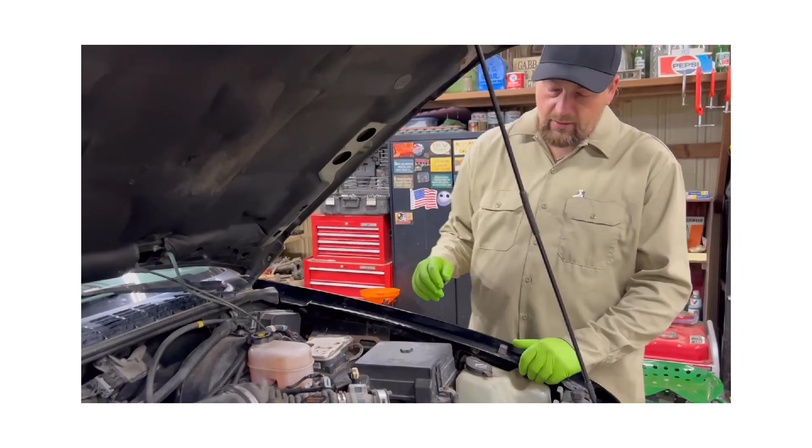Look here at our first part. Here's where the air comes into the engine. It goes through this filter, then up through the box I just took out, to our mass airflow sensor.

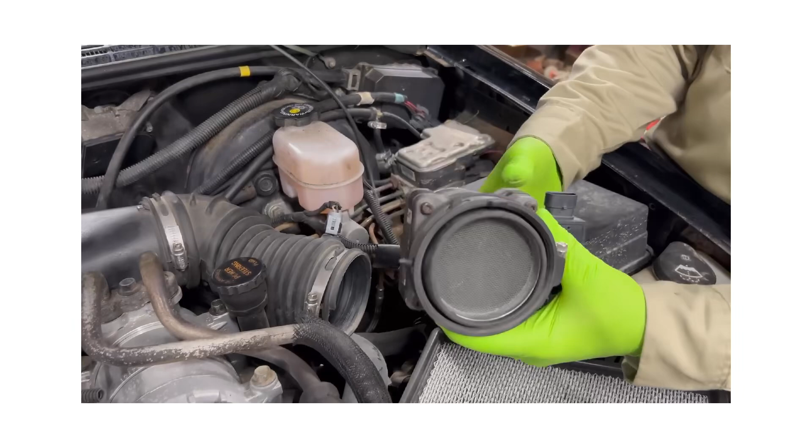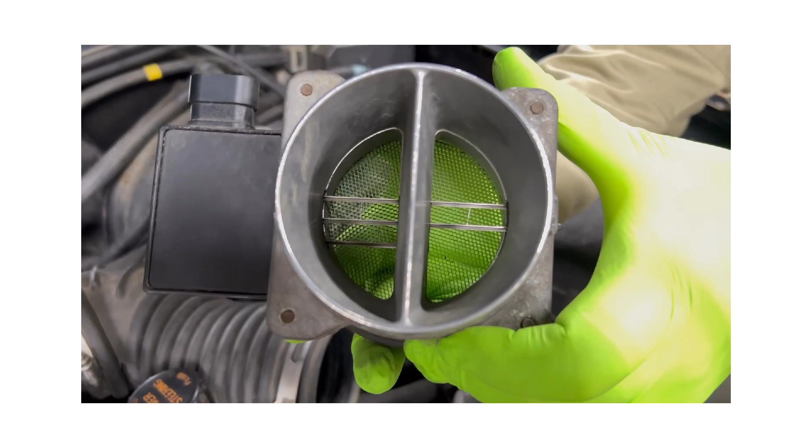Our mass airflow sensor, if there's ever any issues with it, most times we'll set a check engine light. When we look at it, we make sure all those little fins in there are clean and straight, because their purpose is to make sure the air flowing through here flows across the tiny wires inside this sensor. Those wires sense the amount of air coming from the front of the truck past the air filter into the system.

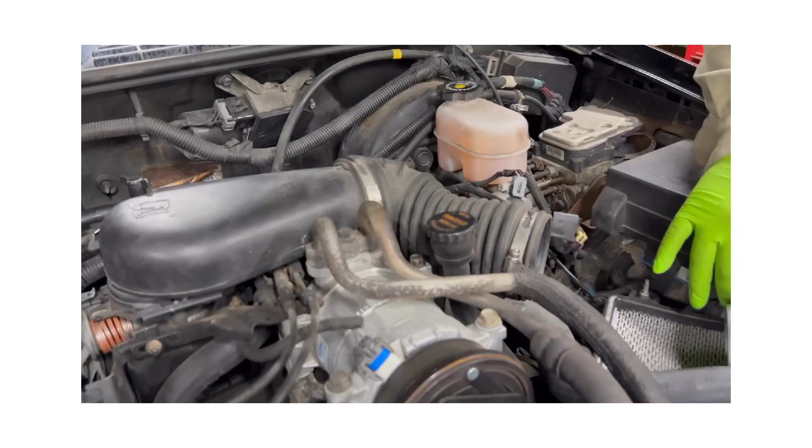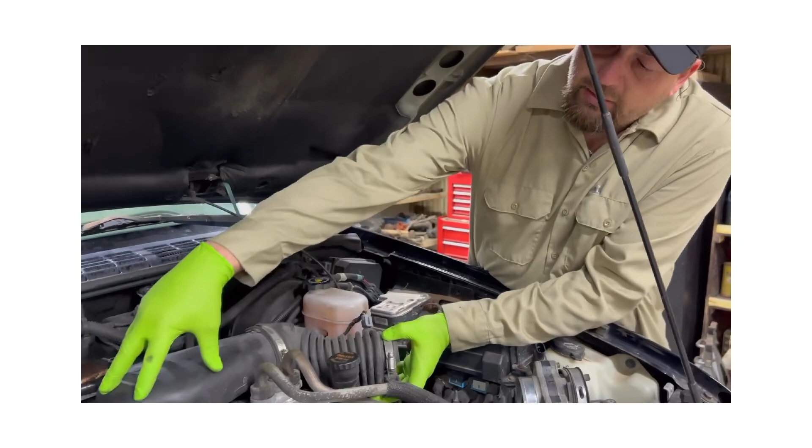From your mass airflow sensor on back, all the air that comes into the engine should be coming through this. If not, it's unmeasured. When we look at our ductwork from our mass airflow sensor down to the throttle body,

we notice we've got rubber and it flexes. Any of these little creases right here, as the vehicle gets older, can dry rot or crack. Our hose clamps can be loose and not sealing correctly. Any of that can let air into our system. We need to know the amount of air coming into the system because we want to know the amount of air to mix with fuel.

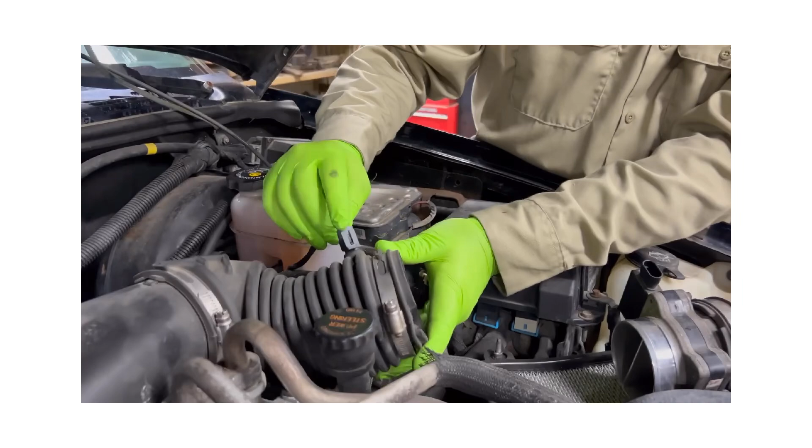The other thing we need to know, this is our air temperature sensor. We need it because cold air is denser than hot air - there's more oxygen in cold air.

So, like I said, we want to check and make sure we have no leaks from here down to the throttle body. We check the PCV valve hose. Any place there's rubber hose going into the intake, we need to check it. It can crack, it can rot, it can suck air into the engine that's not being measured by the mass airflow sensor.

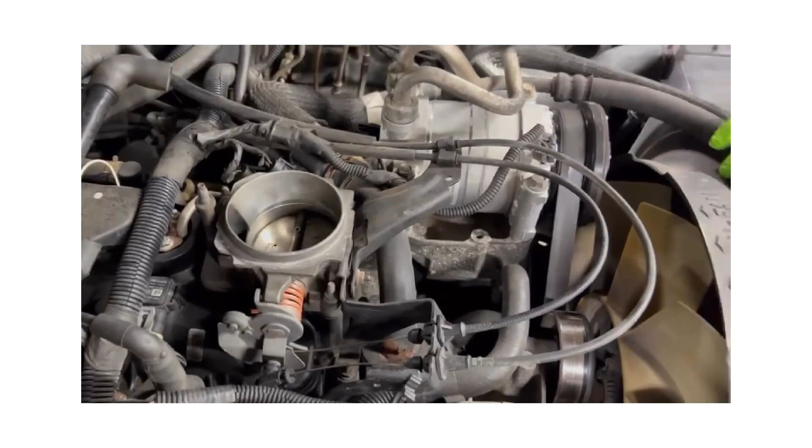We get into the throttle body. When we take that off, we can see our throttle body. We see on this one that it's cable actuated. The cable is connected to your gas pedal inside the truck. When you pull that gas pedal, it pulls this cable, which opens and closes the butterfly here in the throttle body.

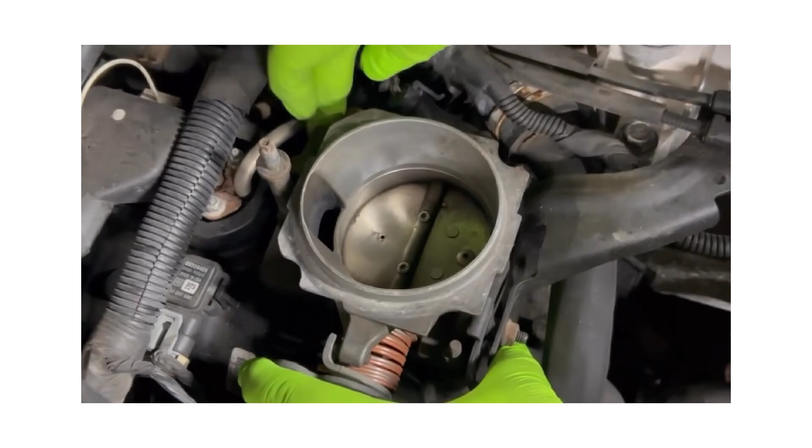Right now it would be set in idling. We have an idle control solenoid on the back side here for whenever it's closed. Our idle control solenoid has a little valve right here that opens and closes to allow air in while it's idling.

Whenever you push on the gas or accelerator pedal, we move this throttle butterfly. As we move it, you can see how it opens. Our computer needs to know how that opens, so it uses another sensor over here on the opposite side of the throttle body. That is our throttle position sensor.

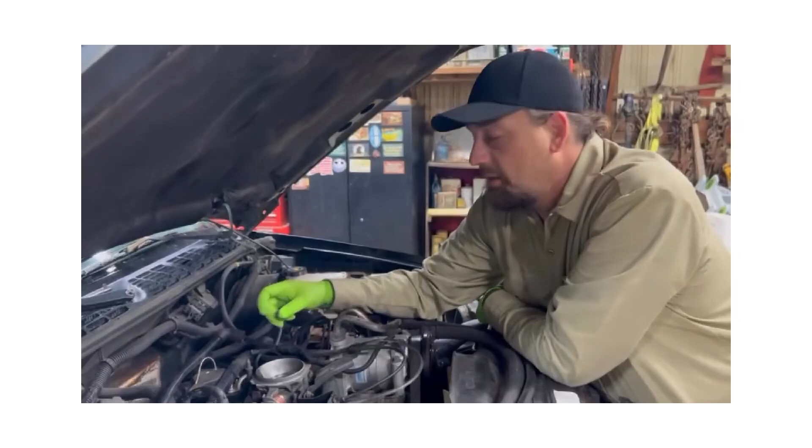Our throttle position sensor is just a resistor that goes across the board. It swings as our throttle swings. When it does that, it sends a different signal to our engine control module. Our engine control module then uses that information to make sure we have a good air to fuel mixture.

Our air to fuel mixture should be roughly 14.7 to 1 - that's 14.7 parts air to 1 part fuel. Whenever we burn that, most of what comes out the exhaust is just H2O, which is water vapor.

As this thing runs and drives over the years, you can look down inside of it and see the black carbon that builds up along this butterfly. That can cause the butterfly to stick and make it hard for you to push the gas pedal down. It can build up where it doesn't allow the butterfly to close or open all the way.

Those are all things that can cause this sensor to set a code and send a code to your ECM, which will turn the check engine light on.

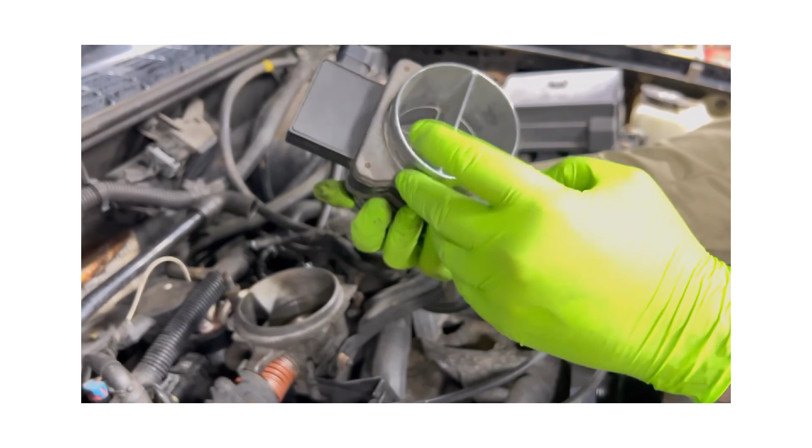Our mass airflow sensor can get built up in here. Whenever it gets built up, it restricts airflow. When it builds up on our wires, that doesn't allow them to read the amount of air coming through correctly, which can turn on a check engine light.

We go down a little further. This is our intake, where everything gets sucked down into here. We also have a sensor called a MAP sensor, which is manifold absolute pressure. It reads pressure and vacuum inside the intake.

Our biggest issue there, again, is it can have carbon buildup. It's got a little tube on it that sits down inside here, and it reads the air pressure or vacuum inside the intake.

Whenever you compress stuff, you have more oxygen in it. Whenever there's a vacuum, there's less oxygen. That's all stuff our computer needs to know to make sure we have the right air fuel mixture to go down into our cylinders.

After we have the correct air fuel mixture and our air measured, we've got our injectors down inside, which are going to shoot our fuel into the cylinders.

Next, we're going to go to our timing system.

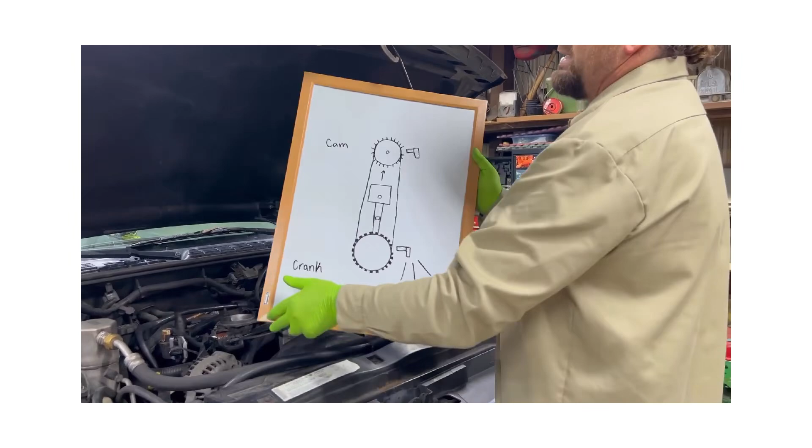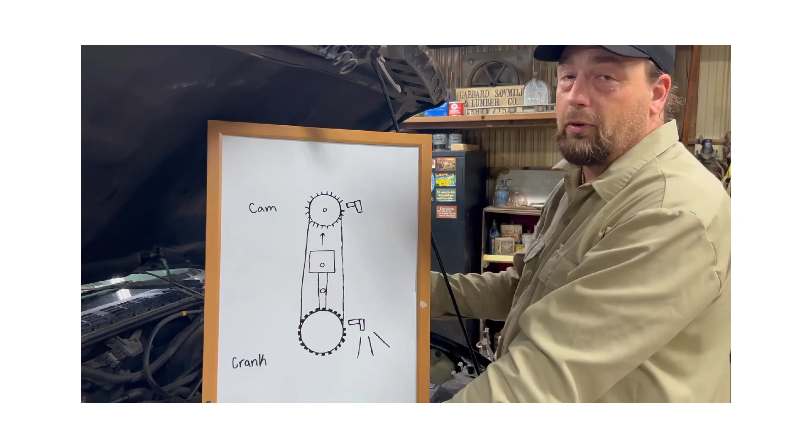Since it's a pain to get to the crank sensor and the cam sensor on this vehicle, I don't think my cameraman wants to crawl on the floor to get to our crank sensor, and I don't want to pull the distributor out to get to the cam sensor. We're going to show you a simplified version on a 4-cylinder.

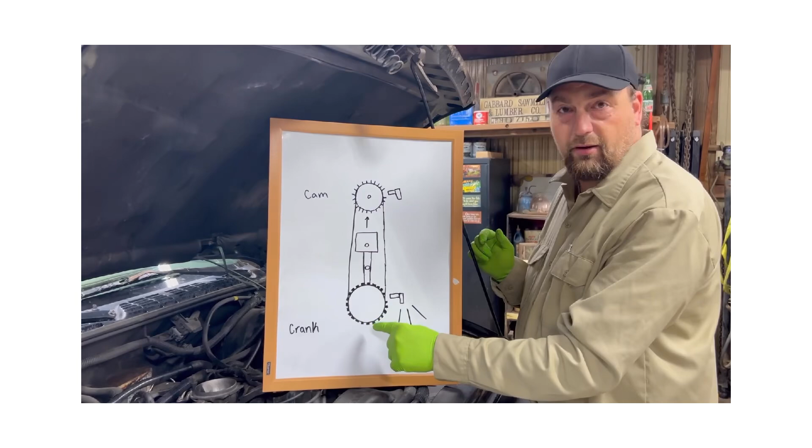Your crank, which your pistons and rods ride on, goes up and down inside the compression cylinder, causing your compression. The crankshaft sensor reads each one of the teeth on the gear, which is attached to the crank. It has one notch that's a little wider than the rest.

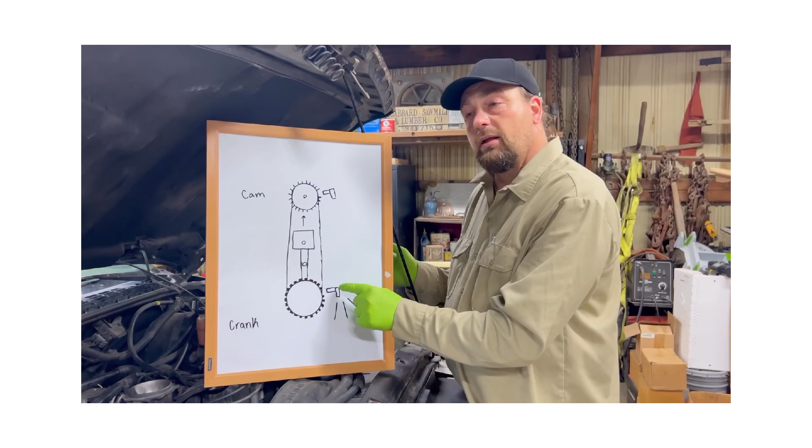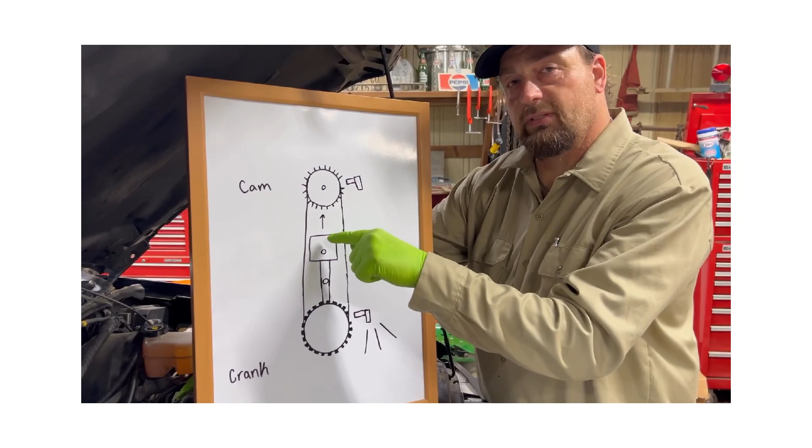That notch indicates to this sensor that the crank is on top dead center. Top dead center is the first place your computer wants to measure — it measures number 1 cylinder at the very top of the stroke, the first stroke.

This sensor is a magnet sensor. Every time one of these little teeth passes the magnet inside this sensor, it sends a signal back to your ECM.

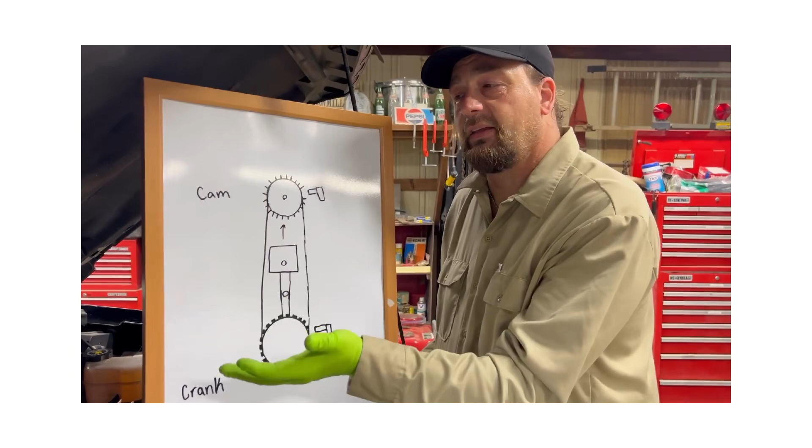That's what tells your computer where your piston position is. It can calculate cylinder 1 in the front, it can calculate 4 cylinders, 8 cylinders, or even 16 cylinders — all by the teeth on the bottom crankshaft.

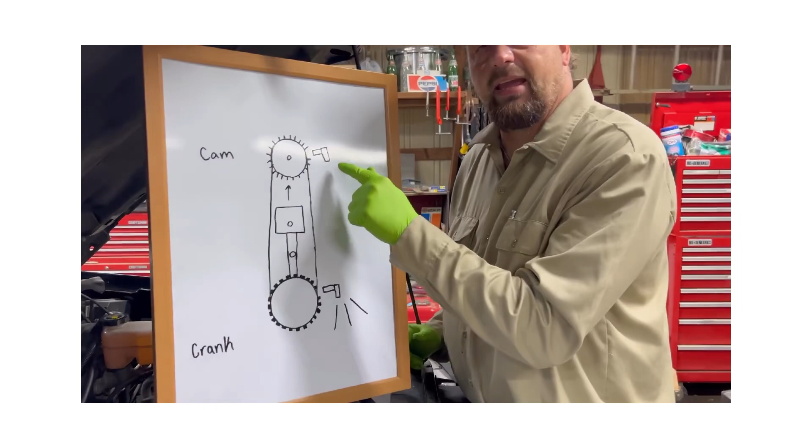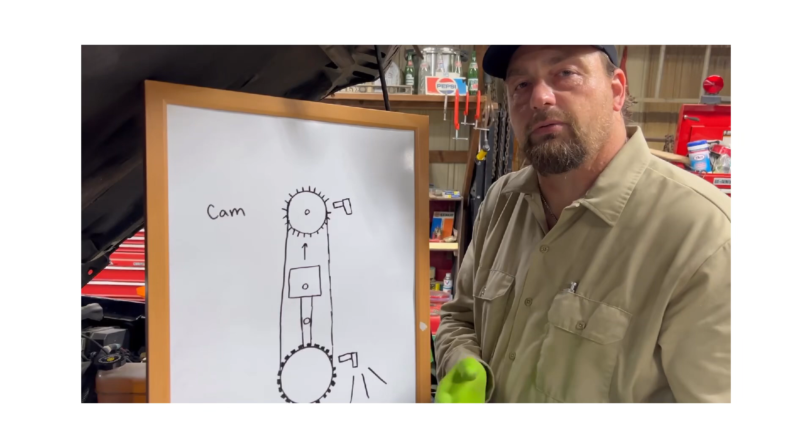Next we have a cam sensor, which works on the same principle — it's a magnetic pickup. Your cam will have teeth on it. Your camshaft opens and closes your valves, which allow the air and fuel into the cylinder.

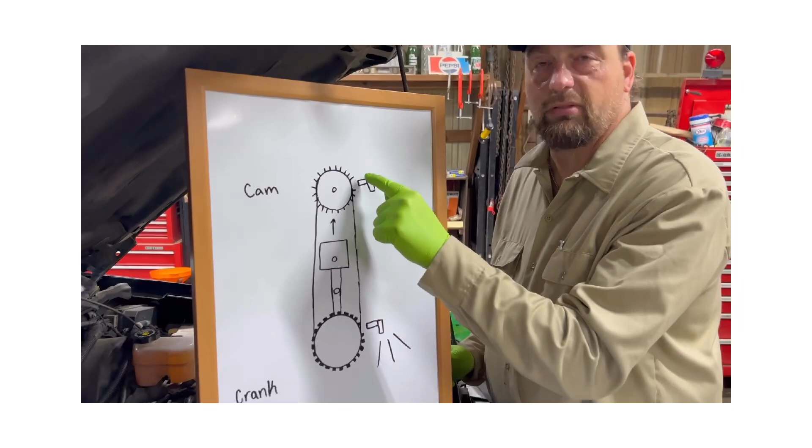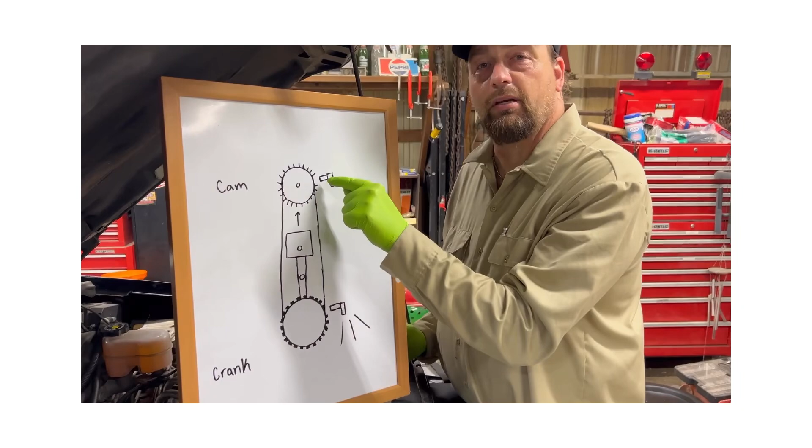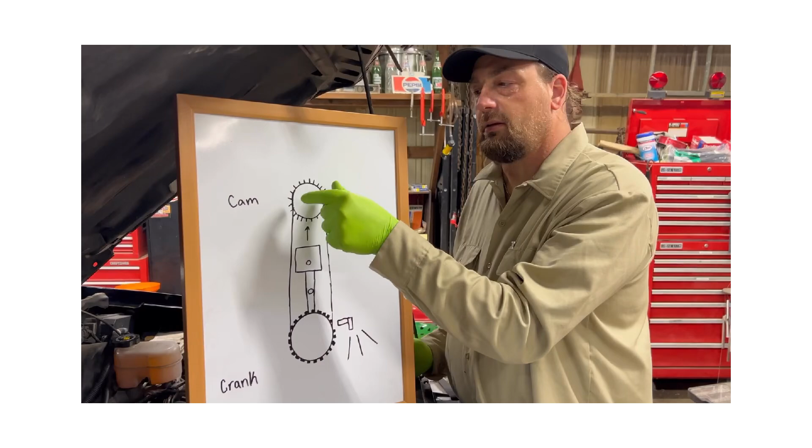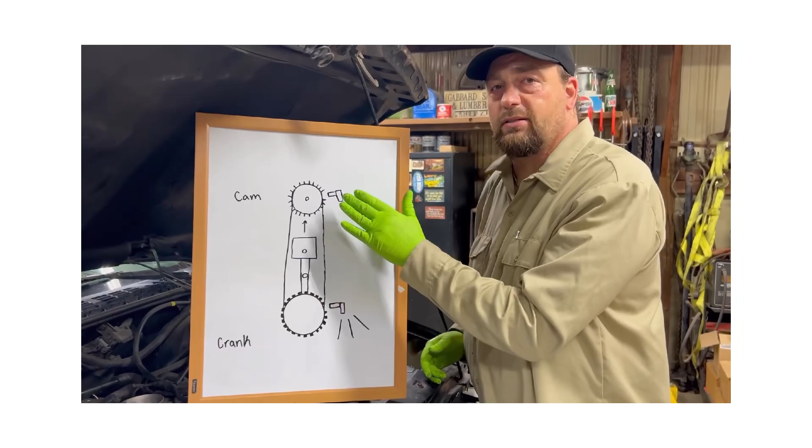It wants to know where the cylinder is and where the cam is, because the cam lobes push your valves open. There's a certain point where it wants to open the intake valve. This tells the engine where it's at, and keeps everything in time, especially on newer vehicles that adjust cam timing using cam phasers, which can advance or retard the timing on the engine. Like I said, it's just a magnetic pickup reading that information for us.

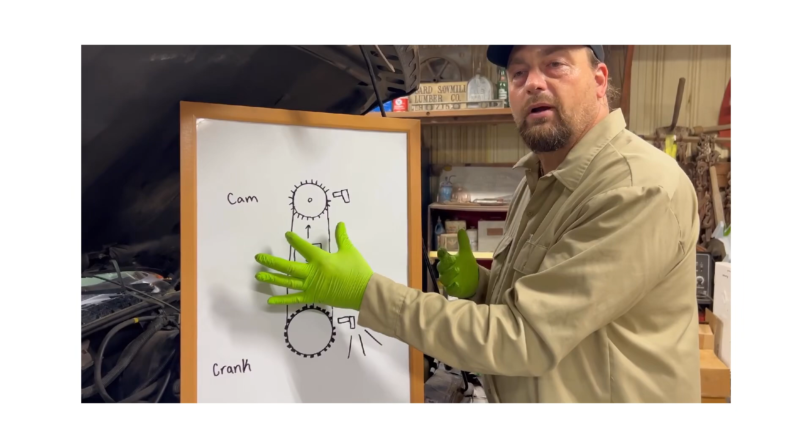All of this is designed for our fuel to get down into the cylinder at the right time and the right mixture. If everything's working correctly, we have good power and good emissions.

And that's, in a nutshell, your air fuel system and your timing system. Thank you for your time.